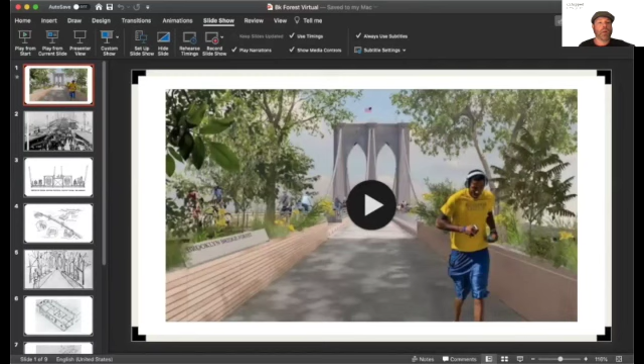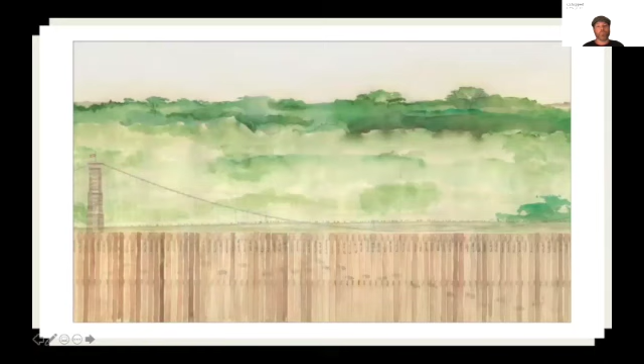For more than 137 years, the Brooklyn Bridge has welcomed and inspired people from around the world. It's been a source of pride for New Yorkers and a symbol of what can be done against all odds. In our time of uncertainty today, the bridge remains a source of inspiration, and we believe it can become a platform for addressing some of today's most pressing problems. Over the past 10 years, our team, architects, designers, engineers, foresters, and ecologists, has been working together to forge connections between the Brooklyn Bridge, New York City, and a partnering tropical forest community. We're really excited to share our presentation with you, and we look forward to discussing it.

Today, humanity faces major challenges: the coronavirus pandemic, systemic inequality, loss of biodiversity, and climate change. These challenges are immense, but they are also an opportunity for imagination and courage, an invitation to fix broken systems, and to support new generations to co-create a future characterized by social equity and interdependence with nature.

Brooklyn Bridge Forest reimagines the bridge and the neighborhoods it connects as revitalized and expansive public spaces suited to today's needs while being adaptable to an unpredictable future. We reimagine the bridge as an icon of climate action and a symbol of the unique power cities have to protect and restore nature locally and around the globe.

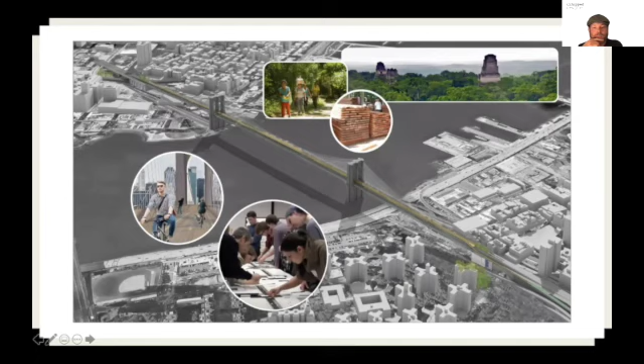At the center of our proposal is the idea that people from all walks of life must have a voice in the renewal and reimagination of such a beloved landmark and the city around it. There are 4 basic pillars to our proposal: an expanded promenade, new cycling and alternative transportation infrastructure, microforests, and community engagement.

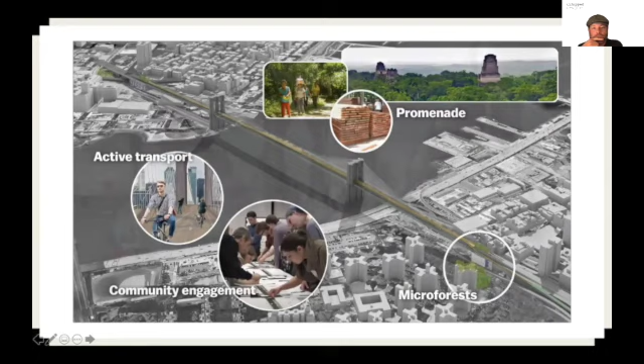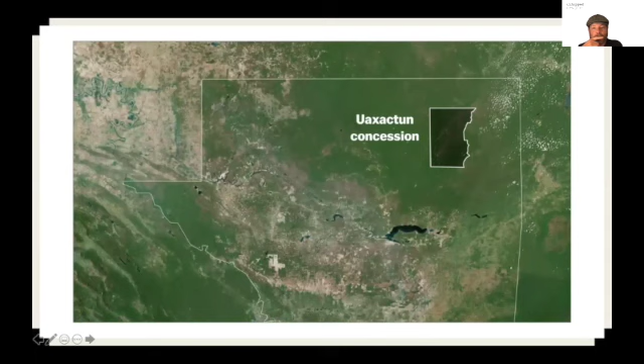Pillar 1: a historic wooden walkway will be rebuilt using planks sustainably sourced from a 200,000-acre partner forest in Guatemala. The new walkway will have pedestrian lookouts, places where people can safely pause, rest, and enjoy the view.

Our innovative and equitable funding model invites participation from people of all ages and income levels to sponsor each of the 20,000 new planks. Pillar 2: the bridge will be a beacon for alternative, greener modes of transportation.

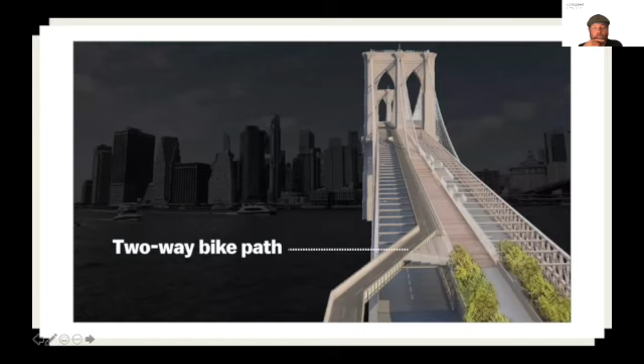Up at the promenade level, we propose a new dedicated 2-way bike path running alongside the pedestrian walkway. At the lower deck level, 2 traffic lanes will be immediately converted for use by bicycles and electric assist vehicles, improving access and safety while making a bold statement about New York City's commitment to low carbon transit.

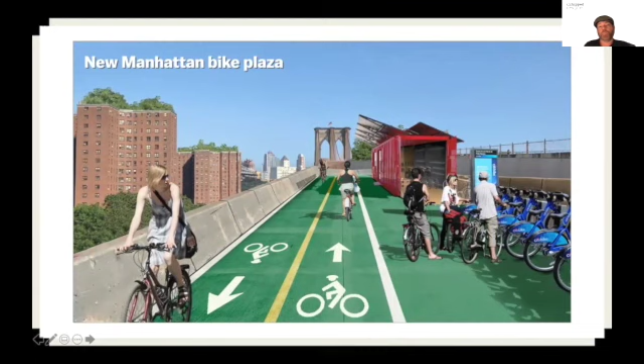Pillar 3: at either end of the bridge, microforests will revitalize the urban landscape, providing access to nature in underserved areas. These small, biodiverse forests will help the city meet its sustainability goals and create opportunities for community building and education. And Pillar 4: community engagement will be the basis for all decision-making.

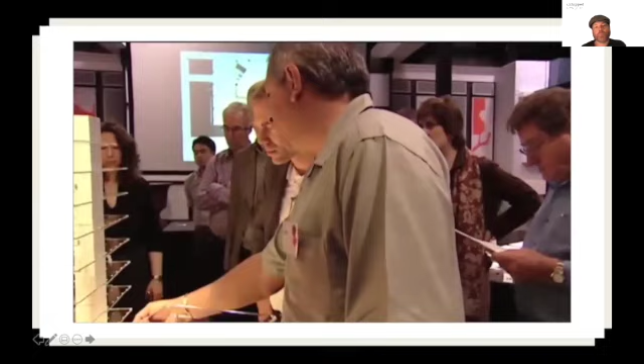Our unique co-design process, which we call the sandbox, will be implemented to ensure that the bridge serves the city as a whole, and especially its marginalized communities.

Our proposal meets some of One NYC's most challenging sustainability goals head-on, while equipping the Brooklyn Bridge to support both present and future needs. By implementing the Brooklyn Bridge Forest, New York City will create 2.5 acres of magnificent outdoor public space with natural forests.

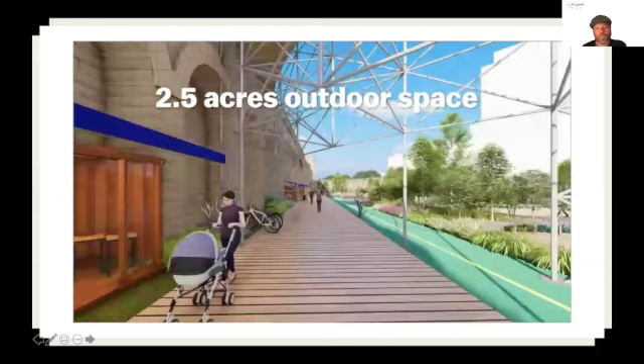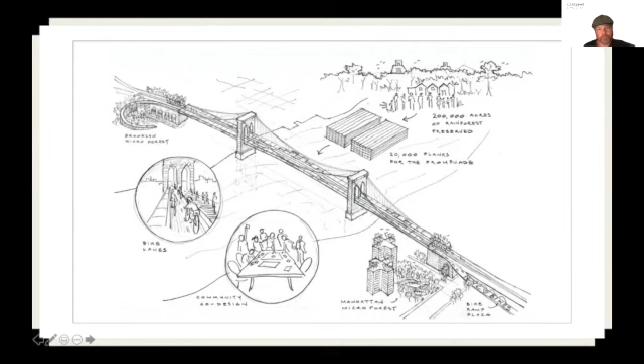It will triple the bicycle and pedestrian capacity on the bridge, unlock innovative pathways for NYC's climate action planning while protecting a rainforest, and inherit replicable design components that can be implemented elsewhere in projects throughout the city, like park benches and other boardwalks, while receiving $20 million worth of self-funded sustainable infrastructure.

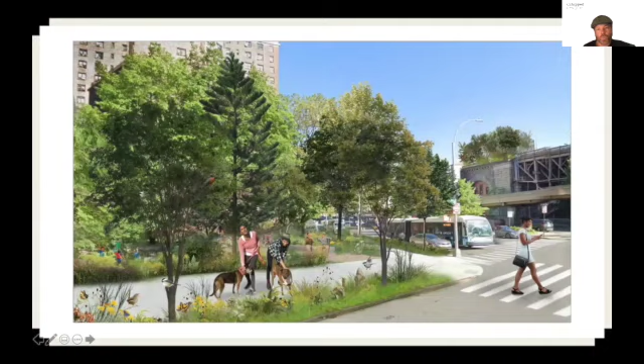And these outcomes are attributes of the sustainable, equitable future that we would like to cultivate. The Brooklyn Bridge Forest not only reimagines the Brooklyn Bridge, it reimagines our relationship with nature, cities, and our global climate, using the Brooklyn Bridge to lead us there.

Very cool stuff. So, all right, Scott.

Yes, I've watched that video now twice. This will be the 3rd time. And I always, two things, one of which I want to get out on the bridge, especially on a day like today. And two, I'm really jazzed about two topics that you tackle head on with this project.

One of which is the growth of the promenade, which makes it more of a breathable space for everyone, bikers and pedestrians, because as a lot of us who have used the bridge know, it's not that way right now. But also your activation of the spaces around and in the anchorages, which I feel is one of my biggest complaints about the bridge—the city keeps us very far away from the anchorages, and they were spaces that the Roeblings really wanted to activate for the public from the minute they designed them.

That being said, I'm going to let you start with what you would like the insiders to know or to take away from that overview of the project, and then, like I said, we can get more into it. So go ahead, that's great.

Well, thanks for flagging those two areas. Those are two very important concepts that we built into our proposal. I'm going to give a little bit more background—the Brooklyn Bridge Forest is a concept that goes back 12 years.

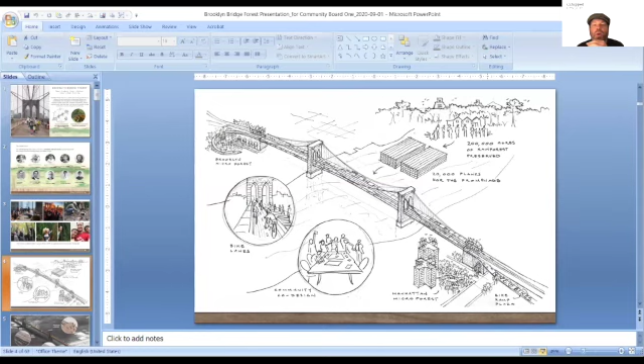But I think it was pretty universal that everyone thought about the importance of giving people of all classes an equal place to experience the city, basically a park in the sky. One of the interesting things is the accounts—I believe this comes from The Great Bridge, which is a favorite book of both of ours—when people got up there, it was the highest they'd ever been because of the height of it.

A key feature of this bridge, unlike many other bridges in New York, is that the pedestrians are up on top and you get this clear view out over the traffic. Anyone who's walked over the Manhattan Bridge knows it's a very different experience—you're down, you feel like a second-class citizen, whereas on the Brooklyn Bridge you've got the key view. You're in the pole position here.

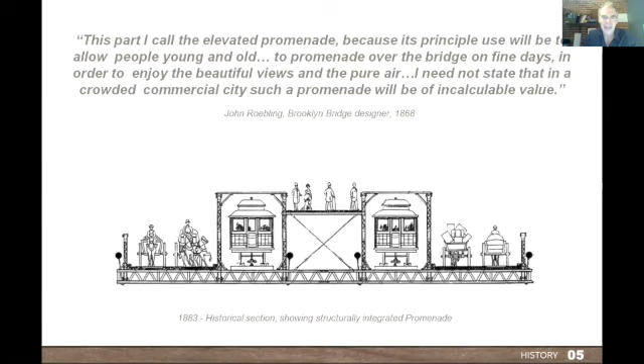Again, using this tropical hardwood sourced from a sustainable partner forest, each plank comes with a sponsorship, so that forest can be renewed, maintained, and supported adequately to grow this wood.

Another key feature relating to the anchorages is the idea of the microforests—in this case, what we call the anchor forest. It's a very tiny element because it's just what we can fit into the flanks of the anchorage. Just before you walk out onto the wooden boardwalk on the anchorage, you're still on the stone structure, cradled in this little microforest, and then you launch out onto the bridge.

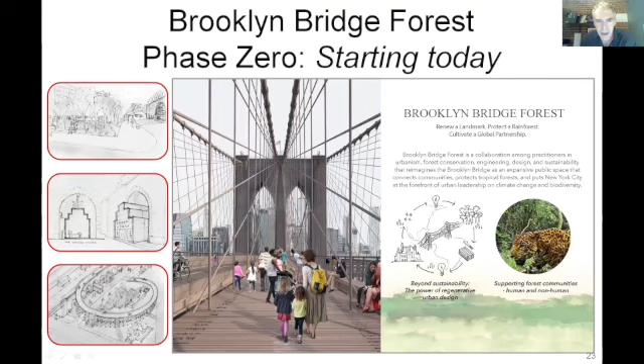This is an example of one of the microforests on the Brooklyn side, and we're proposing what we're calling a pop-up bike ramp to allow bicycle traffic to get up onto the bridge within a very short order. We have a vision of getting going on this immediately—this is an example of a space that's underused right now, and we could do this within a year and get bicycle traffic on.

In the end, we see that the Brooklyn Bridge will have not only this upper bike lane, which will probably take several years to plan, design, and build, but these lower lanes could actually be done immediately with a Jersey barrier. That connects to this idea of getting the bicycles up onto that lower deck lane.

Justin, any questions with that? Yeah, I mean, I think that's great, because one of the most frustrating facets of the bridge right now is that bikers feel like the redheaded stepchildren of the bridge, because they're trying to use it to get to a destination. Meanwhile, you've got all these tourists or people enjoying the bridge as pedestrians, packed like sardines on one side, and they drift off. We've all been there. Was the idea of providing multi-level bike lanes that the top bike lane is for those who want a leisurely ride with the view, and the lower bike lane is for those who just need to get to Manhattan or Brooklyn?

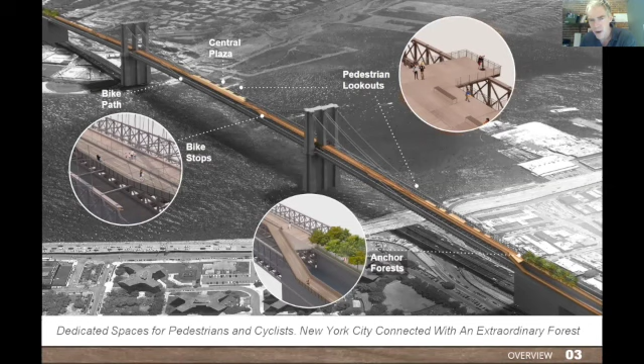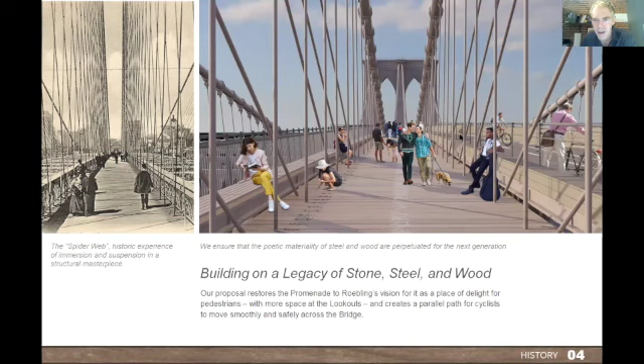One other key concept here - I love this shot because it shows that same proportion from the past, and we're trying to capture that in our new vision. But the way the cables currently come through - sorry, this is a small photograph, but if you zoom in, you can see it's as narrow as 10 feet here. This is, I'm sorry to say, a horrible intervention that DOT has enacted on the bridge, where they've encased the cables with these massive steel cages.

And this just happened about 6 years ago. Previous to that, there was a very modest guard around the cable, much more like this photograph here. So our intention is to remove those, which widens it up a little bit, both physically and visually.

Given that there are some security concerns, we believe there are alternative measures that can be taken to deal with whatever those concerns are. Frankly, we have a hard time understanding, even as an architect and an engineer, what specifically they're trying to guard against here. But I'm sure they have their reasons.

So yeah, we'll be relieving some of the congestion coming from that pinch point, removing the cycles from the promenade, and creating these lookouts. Those were recent additions, right?

I seem to remember even in college in the 90s, those didn't exist. No, this is just about 6 years ago that those were added. There was, again, a little guardrail around them, but nothing like what this is today.

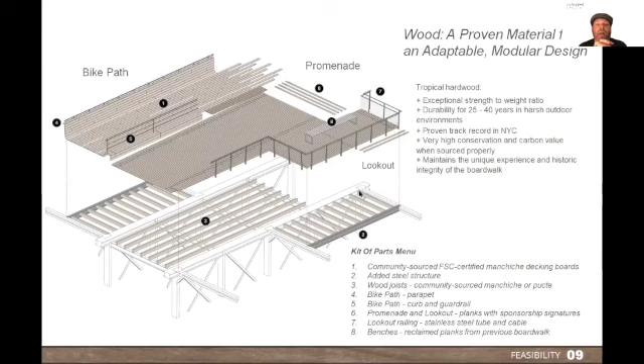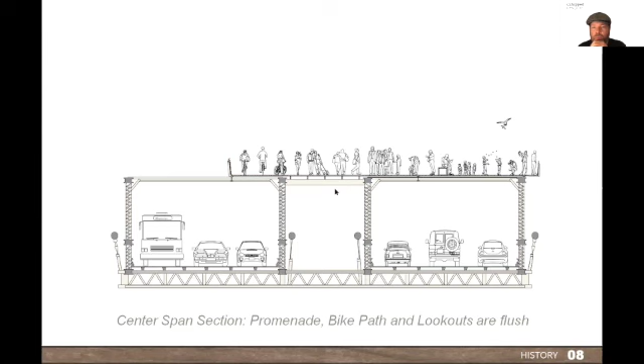Robin has mentioned a point about the views for walkers. She said this proposal obviously favors pedestrians having a south side view, but not a north side view because the bike lane is blocking it. Are there any concessions for people who, like Robin said, like to photograph the north side? Will there be any lookout points or concessions for people who want to look at the north side from the pedestrian lanes?

That's a great question. I should say first that this proposal is a draft, so there's plenty of room and there would be a lot of refinements to this design. These kinds of questions will get asked as we move forward and be resolved.

What we have is something called the bike stop - we've created these lookouts for cyclists that, at different points, pedestrians could come across the bike lane and use those lookouts as well. They're designed to allow the cyclists to stop and have their view on the north side.

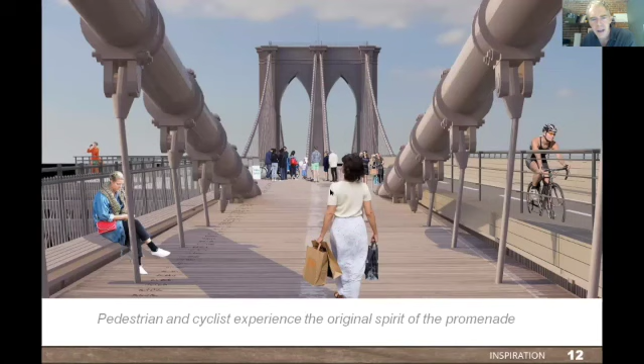The other thing is that in these central areas, the view isn't cut off. It is restricted a little bit by this opaque rail, which, by the way, we may find doesn't need to come up to that 3-foot height - maybe it's only 2 feet, with something more transparent above. So let's just say that if that railing was not opaque, you'd have more or less the same view that you have now.

It's just the fact that there's a railing there. So it's a good question. Right now we are definitely favoring the south side view and the straight ahead view. You still get a panorama.

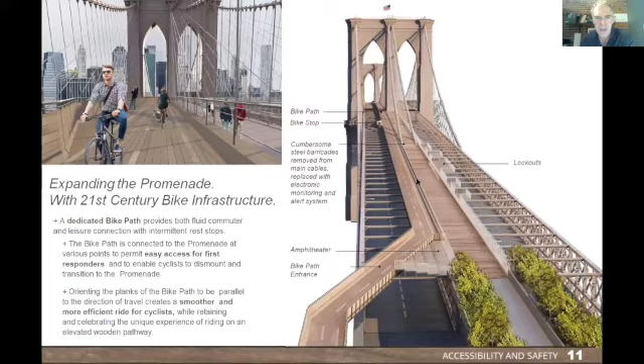Let me see if I can go to this, sort of a typical view. So you can see at eye level here, you're still seeing the city on the north, but you're just not looking down in the same way that you did previously.

Mel asked, did the proposed design fall within all landmark regulations? Has any of it gone for landmark review yet? No, not formally. One of the jurors was from the Landmarks Commission, and I think we actually had strong support from her point of view.

Because our submission was the one that maybe took the heritage of the bridge most seriously. The competition proposal was asking for some pretty radical thinking on the bridge, and we, I think, took the most conservative position.

But the review process has not happened in any official way yet.

But I should just say right now, lest I forget to say it later, that I'm sure there's folks who are with us today that have insights and maybe connections. I would love to hear, and Justin, I'm happy for you to share my email with anyone here on ideas.

Things that we need to consider, people that we might want to talk to, community groups, anything at all that can help to inform our project and also, you know, hopefully move it forward.

I would say that what I'm concerned about is, first of all, I should clarify, winning this competition does not give us this commission. This is not a commission competition. This was an ideas competition. And so the city is bound in no way to do anything or use us to do anything.

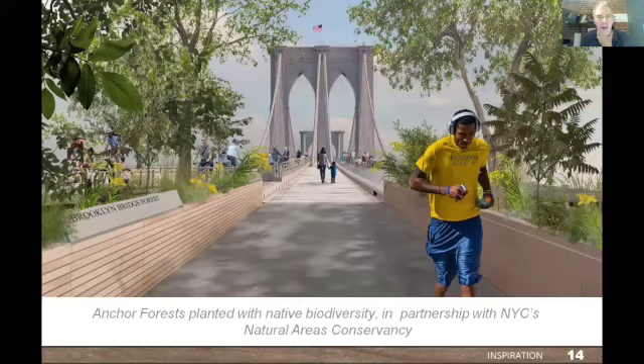Yes, that's right. I've been to this community about 3 or 4 times, and maybe more important than that is that the Wildlife Conservation Society, whose headquarters is in New York City but works all over the world conserving wild areas, have really helped to establish this community.

With the certification from Forest Stewardship Council, with their forest management plans, and their whole conservation ethos.

So Wildlife Conservation Society is one of the key partners on this project. We wouldn't be doing any of this without them. If some of you know them, they're just one of the world's most trusted conservation organizations, who have a very good reputation for working with communities on the ground.

And so this is a 200,000 acre community concession in Petén, Guatemala, which is the northern part of Guatemala. And they have a track record of the highest rate of tropical forest canopy conservation of any of the regions around, including the national parks.

So they know every single tree, and they know which ones are suitable for harvesting. And they never take the best trees. They always take the second or third tier trees to allow the best trees to propagate. And they take one tree per acre every 40 years. So that's the level of conservation that we're supporting by doing this.

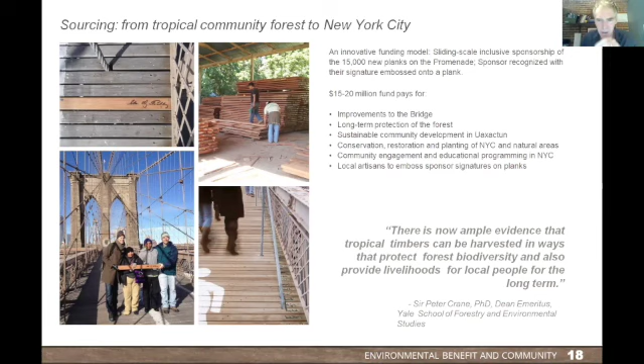Okay, so Justin's question about the anchorage is very important. I'll pause here for a second. We did these timelines for the competition because we wanted to see the time in three different tiers. With the long history, we did a 200-year timeline, a 20-year timeline, and a 2-year timeline. I thought that was really important.

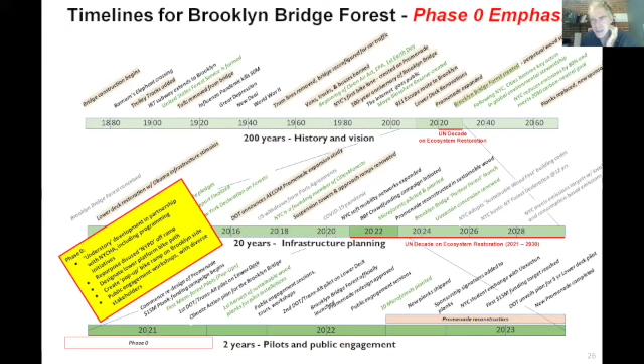We then did a phase we called phase 0, which the competition organizers were very keen on - what could be done immediately, given the urgency of some of these things. The anchorage areas fit into that phase 0 in a certain way.

There were two particular areas. One is this Brooklyn Anchorage Plaza, and I'll show you more details on that - here's a little tiny sketch. Then on the Manhattan side, there was the idea of utilizing some of the anchorage vaults for youth programming, and then the microforest around that area.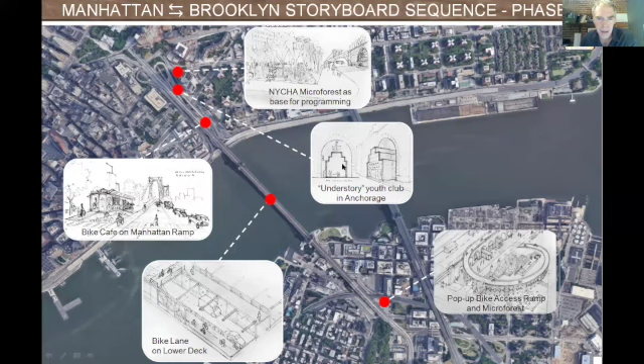So we want to convince the Parks Department, who are the official custodians of that land, to let us do this pop-up - I'll use that word a lot because New York has a tradition of pop-up installations that are done quickly, inexpensively, externally funded, that demonstrate an idea. And that's what we want to do here: show that this space can be activated for public use with vendors using these vaults.

We don't know if we're able to, or would even want to, penetrate the stone diaphragm in the vault, or if we just have to use the section out front for small vendor spaces. We'd create a boardwalk which emulates the boardwalk of the promenade, and then plant this microforest amidst this new bike ramp.

So if you go back to the aerial view, here's that sample boardwalk, these shipping container pop-up vendor spaces for community businesses, some additional bike parking, spaces for meeting, just public spaces for general use that could also be booked for hosting small events, and then this biodiverse microforest starting to bring back some of the plant and animal species that would have been part of the original island ecosystem.

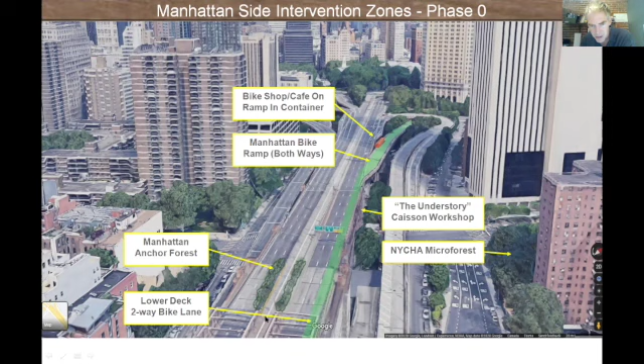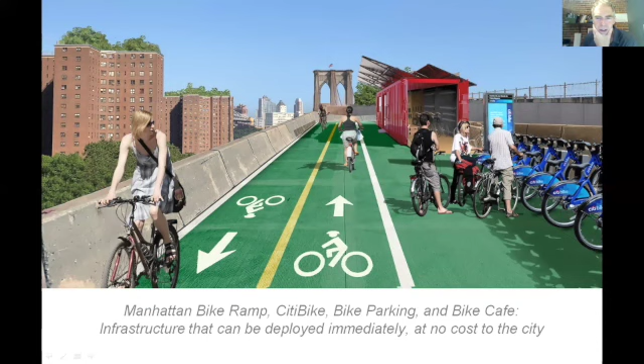Here's the descent onto that ramp, looking up coming up before you get right onto the bridge. You'd have a CitiBike dock and a pop-up cafe there. We didn't get to it in this rendering, but I'd like to bring some of those forest elements onto this bridge as well.

This is the current ramp, being used by NYPD for parking. It was closed off post 9/11 with fears of a truck bomb coming into police headquarters. Bicycles don't fit the category of risk, so there's no reason they couldn't use this ramp. It's also a nice transition from this lockdown phase to something more active and engaging. We hope NYPD will relinquish this ramp - it's a good time for them to find olive branches and do positive things in the community.

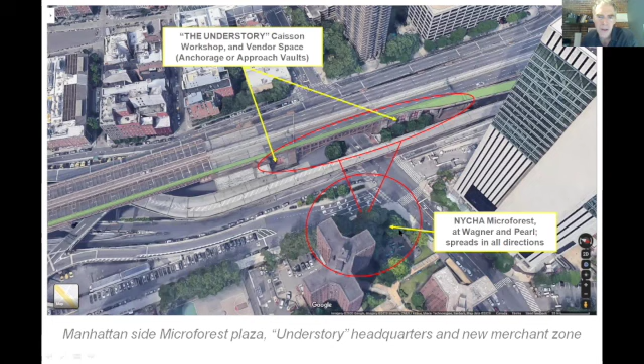Zooming in here's the anchorage and some of the approach vaults. Either one or all of those vaults, we would love to program with engaging youth activities. This NYCHA neighborhood here is just one example, but there's all kinds of neighborhood potentials, and we're focused on youth here - that would be dispersed throughout the proposal.

I'll just flip through these - this is the microforest on the NYCHA property. Here's the Anchorage Vault, you can see it across the way, and here's the microforest on top there. This is again a pop-up concept using mass timber structures, prefab structures which are becoming quite popular, showcasing technology that I think would also interest young people, slipping this thing in.

We call it the Caisson Studio - I spelled it wrong in my sketch, should be two S's. Some of you may know the foundations for the towers are built out of wood, massive timber containers pushed down to the bottom of the East River. Emulating that, we're making a workshop clubhouse space for young people to study engineering, structures, and city history in a fun environment with mentors coming in for guest visits and lectures.

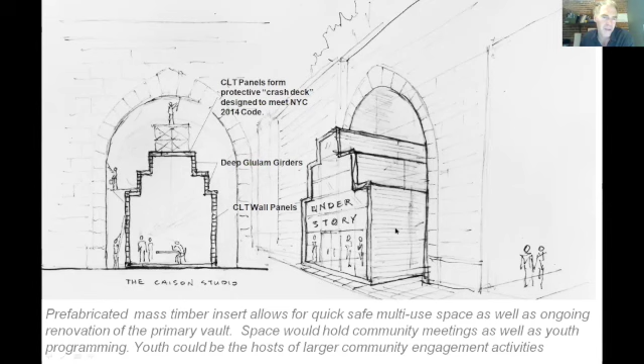We felt this was a really important piece - if we don't get young people involved in thinking about new approaches to the city and its history, we're losing what the next generation needs to contribute. So we wanted to build that in. Here's the existing condition of the Anchorage Vault, and our proposal would be something like this - again, this is a very preliminary design.

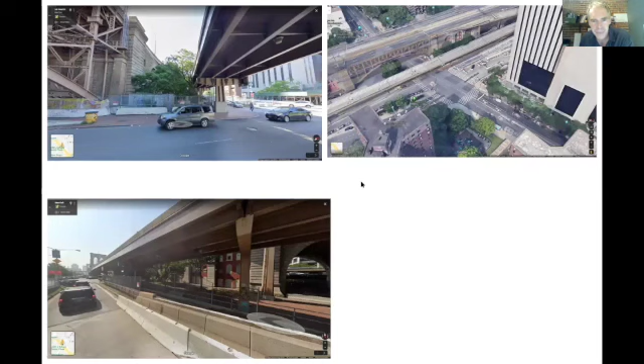Let's say it's a prototype for what could happen in any of the other vaults. There's at least 10 vaults as it goes from the Anchorage down through the approach. On the Brooklyn side, we could do pop-up vendors, and on the south side of the Manhattan approach...

There's all kinds of opportunity. We did lots of sketches for activating that public space, getting something going. We've been in discussion with Pace University, who's interested in doing a microforest, and they're on the south side, so we're hopeful they'll be able to apply some pressure as well. But maybe I'll pause there for some Q&A.

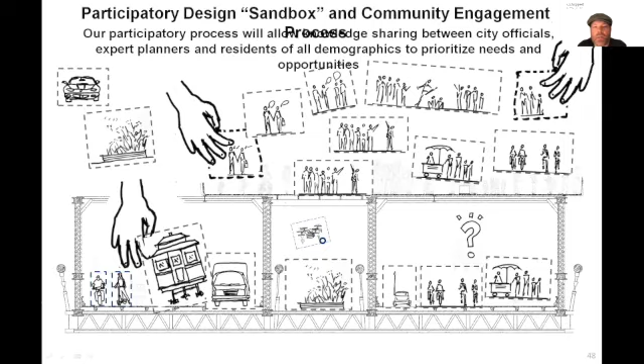We do have a question from Pete, which we'll get to in a second, but I like the fact that you're concentrating on the Manhattan Anchorage for youth engagement because of the density of housing projects in that area. I taught at a school right at the foot of the bridge that serviced a lot of those kids, and they had nowhere to go but the Brooklyn Banks, which was taken away from them again in 2006. So the bridge became, instead of a place where they could engage with their neighborhood, a hindrance because there was nowhere for them to go. So I kind of like the idea of reopening the bridge to the people of the neighborhood, because it's very prohibitive now, which I think is a shame.

I understand why, but this is one of my favorite parts of your proposal. Is there anything anybody would like to ask Scott before I ask Pete's question, which is a really great wrap-up question, which was on the plan to begin with?

Well, Fred says he'd like to see it come to fruition. Thank you, Fred. But Pete asks, what are the city's next steps and timeline? So where do you go from here, Scott?

Perhaps as soon as I get off this call, one of my to-dos today is to reach out to Community Board 3. After our meeting with Community Board 1, they've given us a thumbs up, and they said, get through to Community Board 3, and then let's try to close the loop. There's an introduction, sort of a recommendation being put forward to DOT to talk to us, to work with us.

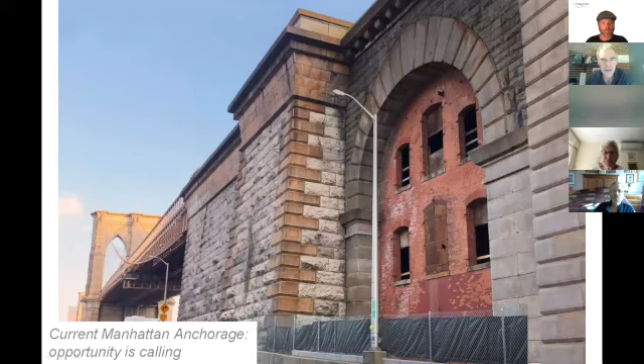We're also starting a fundraising process. So let me see if I can flip to it here quickly, the phase we're calling phase 0, which was getting this first bike lane and the Brooklyn microforest. Let's see, hold on, these are just examples. Sorry about this, flipping through here.

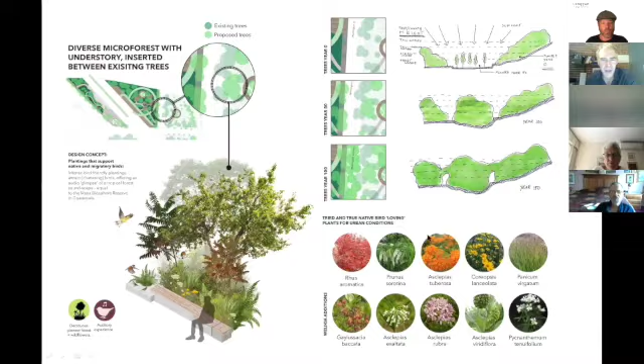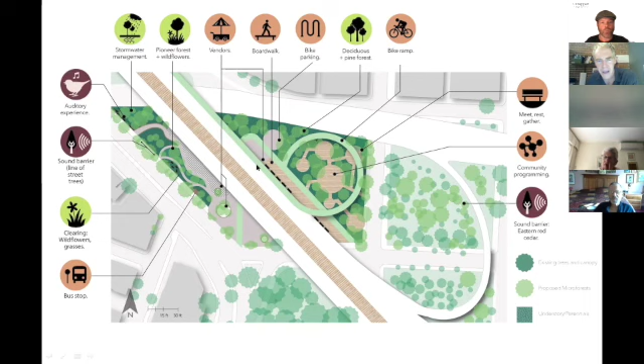We would like to do that under de Blasio's remaining year and a bit. That would mean acting immediately. So we're trying to raise between $2 and $4 million of private sector money to support the Brooklyn Anchorage Plaza with this bike ramp here, and the bike lane, which is fairly low cost.

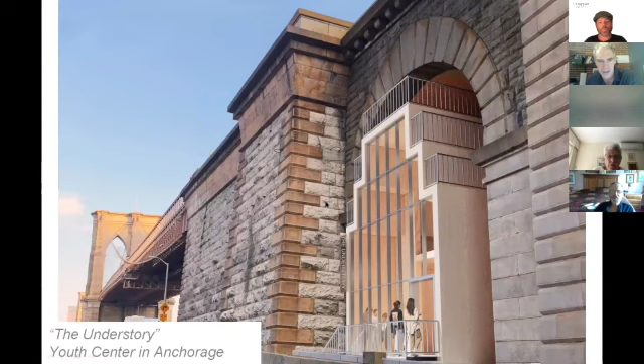It's essentially jersey barriers and paint and some signage and things, and then the Manhattan ramp. Let's see if I can flip back to that, which includes that bike plaza with the cafe. So that's a package pilot that we believe is our foot in the door to the longer term concepts. I don't know if we'd get this understory structure done within that time frame and budget, maybe there's even a quicker version to pilot it with a shipping container or something.

Our goal is to work fast, try to get something happening that's positive in this coming year, and we need a lot of stakeholders brought together to do that. Then that sets us up for the longer term thinking on the redesign and rebuild of the promenade, which is probably a 2 to 5 year project, depending on how quickly the city wanted to act.

All of this falls under the umbrella of the mayoral election coming up in a year, and whether the candidates are going to take this on as a platform piece, or at least give us a kind of a nod of approval of some sort. We're starting outreach to all the mayoral candidates. Corey Johnson was really a key figure in moving this competition forward.

He's the speaker of the city council, so he's very aware of all of this, and he's, as we understand, running for mayor, as is Gale Brewer, president of the Manhattan Borough. So yeah, we're starting all of that process, but I would love to hear if anyone, either on this call or after, has ideas for us on how to advance this.

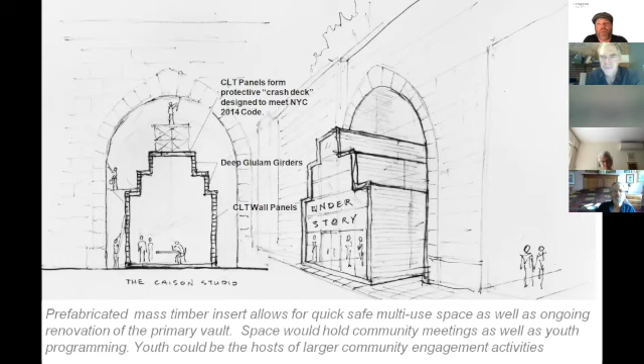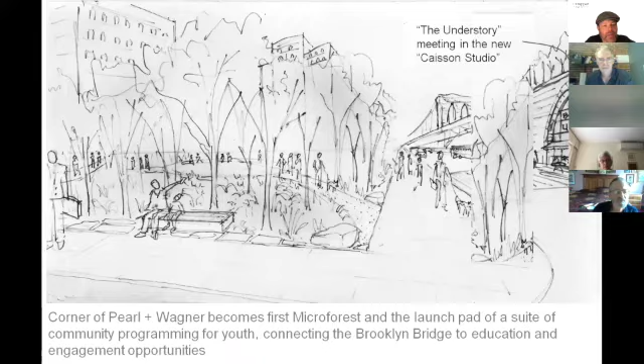Nancy asks, has there been any thought on how the increased bike traffic would be treated once it exits the bridge area? Increased accidents, I think, is what you were saying, right, Nancy? Would be treated.

Maybe clarify the question. Do you mean places like this where the bikes are coming down to the ground in Manhattan or in Brooklyn? Is it specific to one of the sides, or just in general? Nancy, do you have any thoughts on that? Has there been any thought on how the increased accidents could be handled, just in general? She said just in general. Okay, well, it's always a good question.

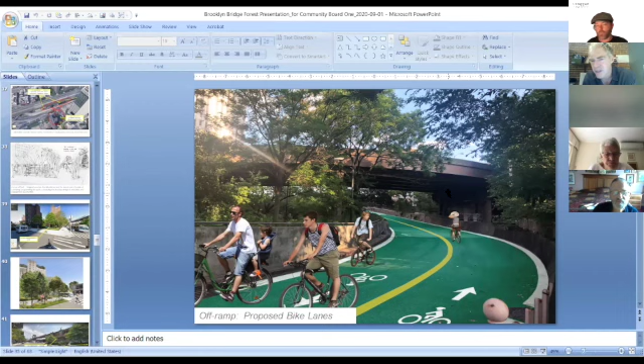I think we're really depending on the advocacy for cycling and all the bike lane work. There's a tremendous infrastructure of people and resources for bike lanes in the city, and we're not trying to solve all of those problems. I think it would be considered a success if there were more bicycles in New York because of this project. I don't know that this project would increase the number of bicycles, but if it did, all the better. And how those are handled when they reach the ground.

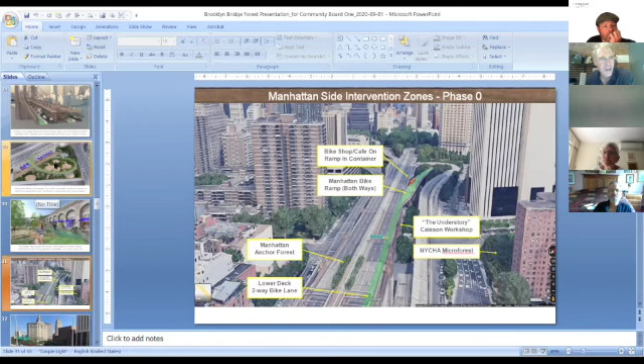Just to see if there's an overview here - for example, this new ramp would come down to Park Row South, and it connects to a bike lane infrastructure that's already in place, and actually the capacity of which is being increased already. So in some ways, the location here is quite good. Likewise, we've done a study on the Brooklyn side, but it doesn't show up in these drawings. Basically, this connects right to a bike lane infrastructure coming down from - I'd have to look at the map - but basically, as you come down from Tillary, you come down right and land right in this plaza area on Washington Street. So there's a bike lane going here.

We've thought about maybe Washington getting closed down to car traffic as a possible measure, just because it's such a popular destination for pedestrians, tourists, and bicycles. But those are, as we say, bigger fish to fry than we wanted to take on. We want to offer these, and then DOT would have to really take these and figure out the mechanics of it. That would be a big fish, but you're right.

Washington in recent history has become such a place to stop and take pictures of that iconic view - I see people laying in the street in the middle of the street to get that shot. I'm like, oh wow, you guys are really taking your life in your hands, huh?

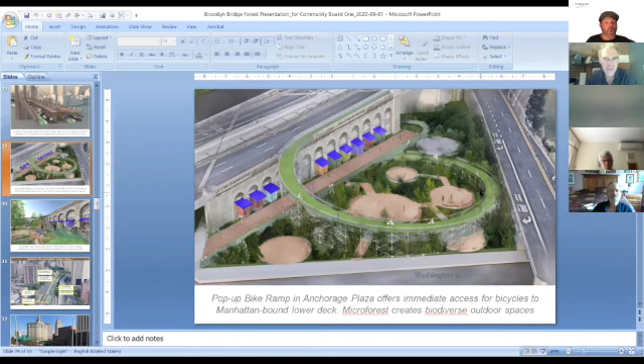Fred sums it up pretty well too in his comment that separating the bikes and pedestrians should be a priority. We are in a very cantankerous dance because I've been both - I've been a biker, I've been a pedestrian, I've been a tour guide on the bridge, and it's not a good situation for either.

It's not any more a pleasurable experience, and as we've seen with the pandemic, biking and people using bikes has increased exponentially. More people are biking, and the Brooklyn Bridge is a really great direct way to get from Brooklyn to Lower Manhattan. Sometimes the Manhattan Bridge is just not where you want to go. People say, well, use the Manhattan Bridge. Sure, I have before, but it doesn't serve the same function as going right to City Hall, Park Row, Centre Street.

And of course, as Scott had said, there's obviously things that can be tweaked and nothing is set in stone, but I think that this is a really wonderful proposal, Scott. I really do think you have thought of all of the things that are on New Yorkers' minds right now, including sustainability, including making more accessibility available for everybody, and figuring out where bikes go.

Nancy said, not expecting an answer, just thinks it needs to be in the discussion going forward, part of the broader city planning, which is true. One of the things I've noticed lately - I was on the street in Brooklyn the other day, and I witnessed somebody get hit by a car on a bike.